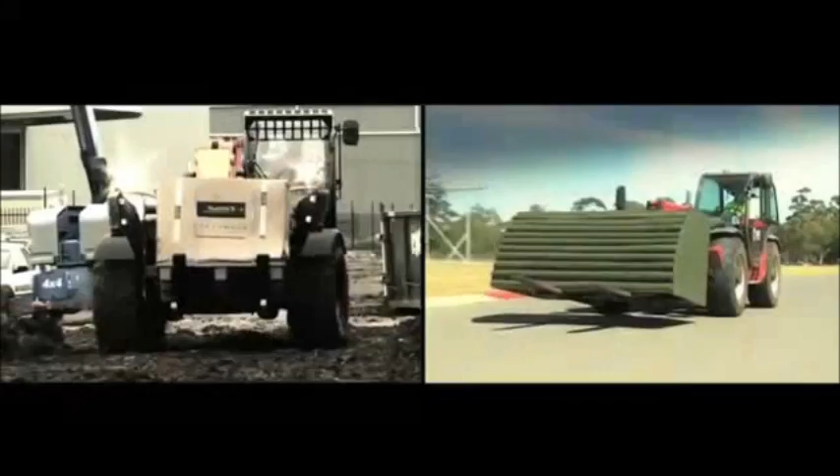This training program for telehandlers has been developed by the Elevating Work Platform Association of Australia, together with major industry partners. It does not attempt to replicate or substitute for any existing programs, but aims to create a safety awareness culture for EWPA members who are using or intending to use telehandlers. The program features short video-based tutorials followed by questions that will test your comprehension of each topic.

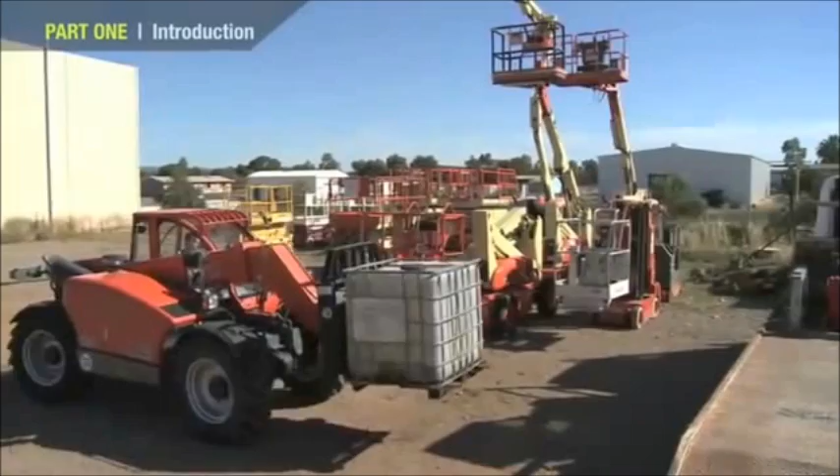This information is provided to offer guidance and duty of care training on the safety aspects of operating telehandlers with standard forklift attachments. It is not to be taken as a statement of law and must not be construed to waive or modify any legal obligation.

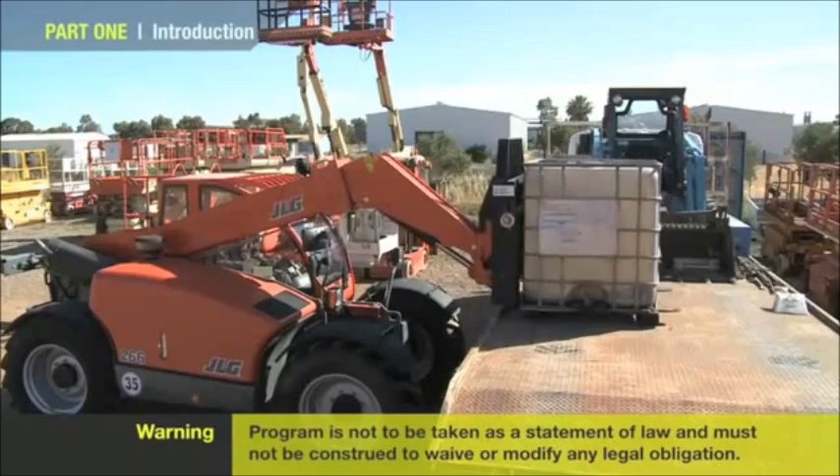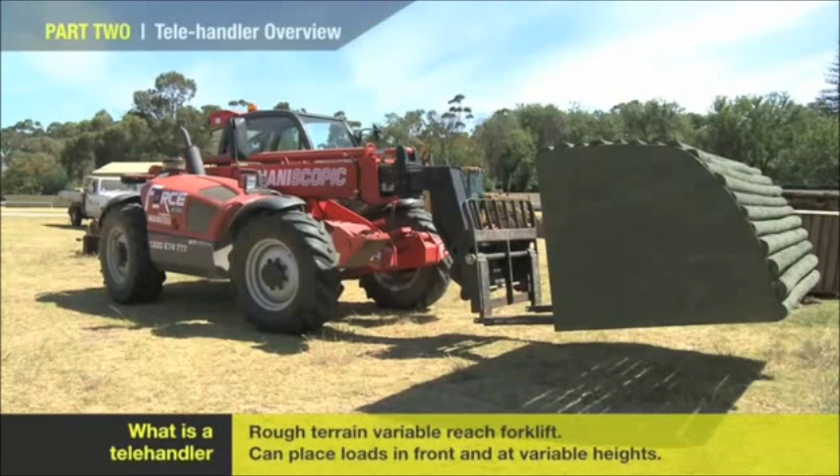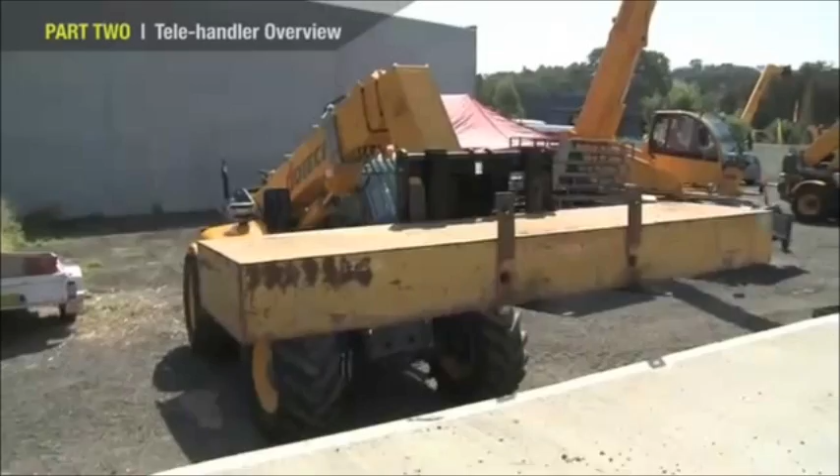A telescopic handler or telehandler can be described as a rough terrain variable reach forklift. Equipped with a telescoping boom, the telehandler is able to pick and place loads at distances in front of the machine as well as at various lift heights. The ability to reach out in front of the telehandler allows the operator some flexibility in the placement of a load. Manufacturer-approved attachments such as crane jibs and EWP baskets can also be fitted.

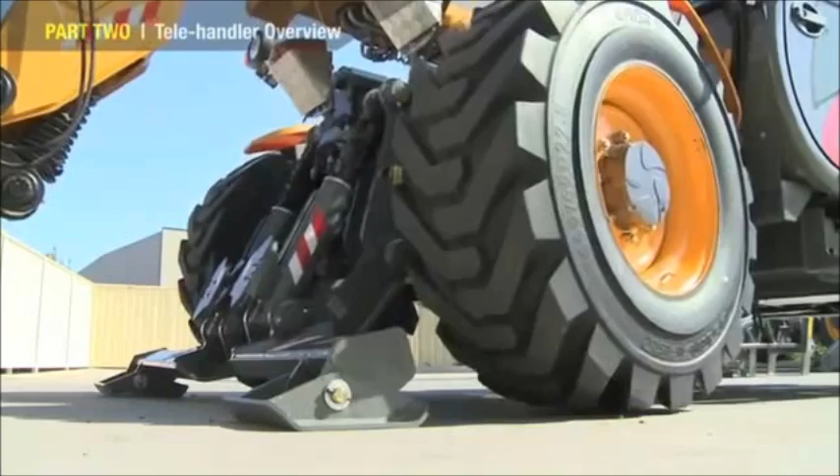There are several types of telehandlers in use, and these can be divided into the following groups: slewing and non-slewing, those that use outriggers, and those that use frame levelling.

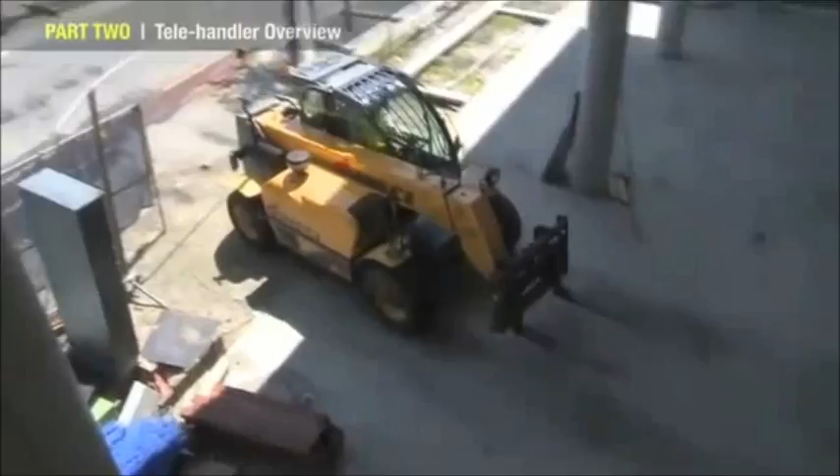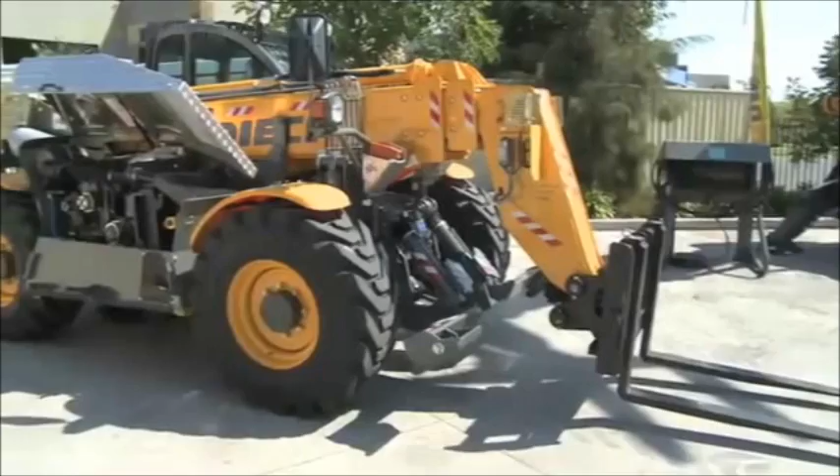To operate a telehandler, you may require specific safety equipment that is prescribed for the conditions you are working in. Typical safety equipment may include a hard hat, safety vest, safety glasses, and steel-capped safety boots. All telehandlers will have specific decals that convey key safety information you need to know. Make sure you understand these decals before you enter and operate the telehandler. There must be a logbook on the telehandler that you must fill in before operation. Ensure the logbook is up to date and stored in the cabin for immediate access.

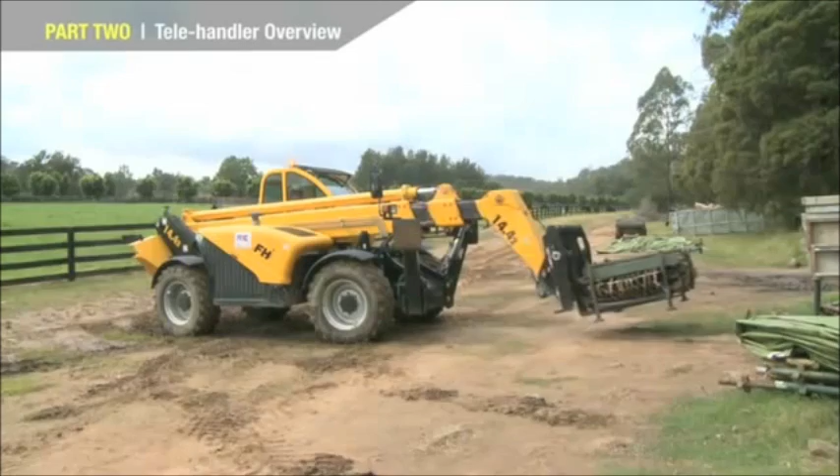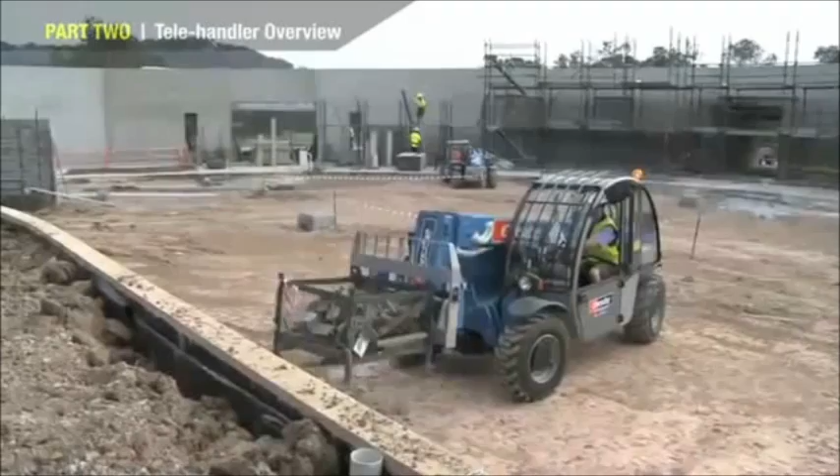Although the forklift attachment is the most common, there are other manufacturer-approved attachments available for use. Approved attachments will have clearly identifiable rating charts and other signs. Unapproved attachments must not be used under any circumstances and may pose a serious safety hazard, such as forks that have been repaired by welding. To work out what you can lift to what height and at what boom length, each telehandler is equipped with a series of capacity charts. We will review these charts in a later section in detail.

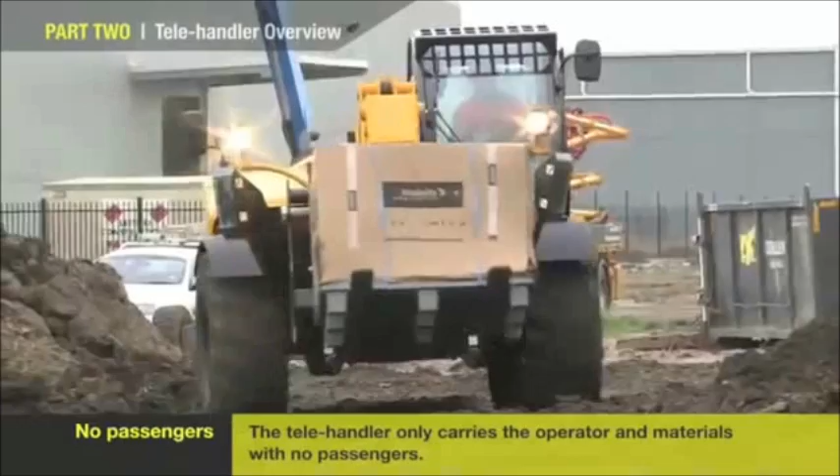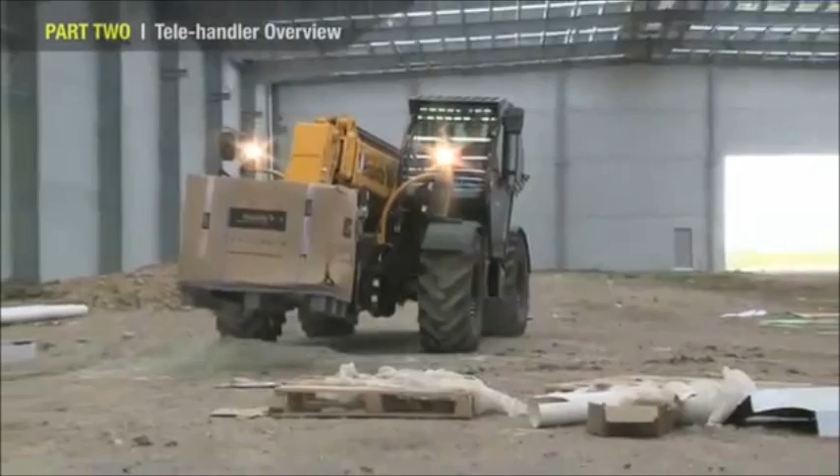There are passing similarities between a telehandler and a car. The main one being that most telehandlers and cars have 4 wheels, pneumatic tyres, and a similar steering wheel and brake arrangement. The big differences are the ones that can lead to serious injury if not appreciated or understood. The telehandler carries the operator and materials only with no passengers. The centre of gravity can shift dramatically on the telehandler with or without a load. Braking is also affected by changes in load weight. The telehandler is designed for low-speed driving and has multiple steering setups suitable for rough terrain.

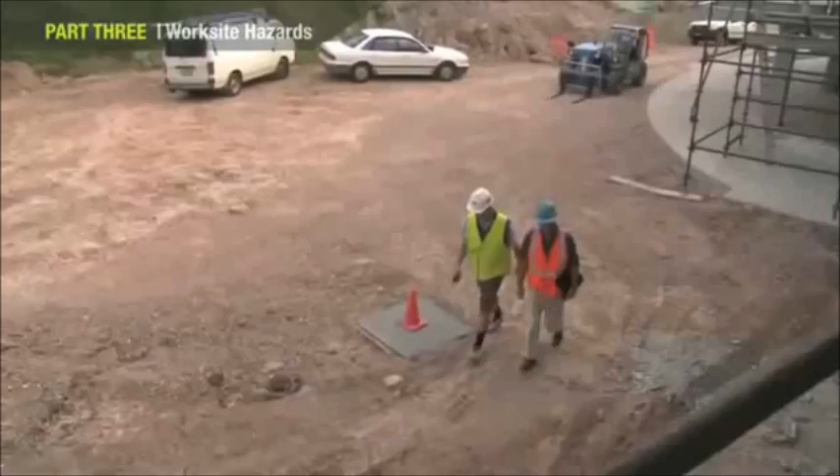Before you operate the telehandler, learn as much as possible about the worksite and carry out a risk assessment. Walk around and inspect the surfaces over which you will be expected to travel. You should discuss site hazards and controls with the site manager before commencing work. Most importantly, you must weigh up the ability of the telehandler to perform the tasks required on the conditions of the surface and around any other obstacles or persons.

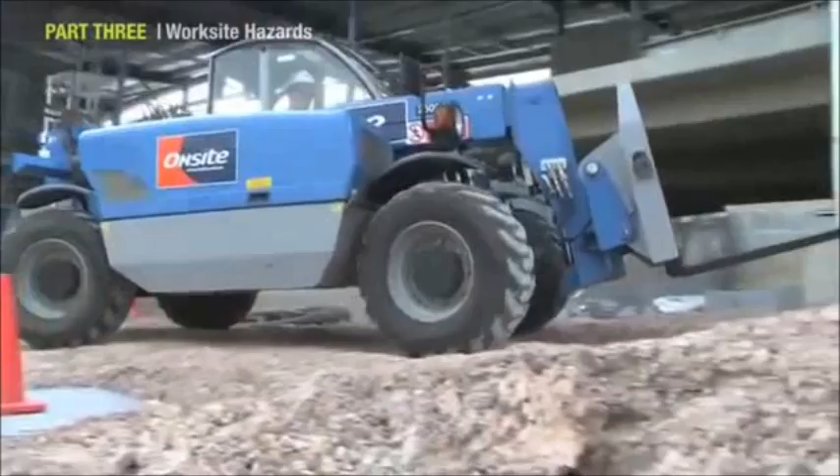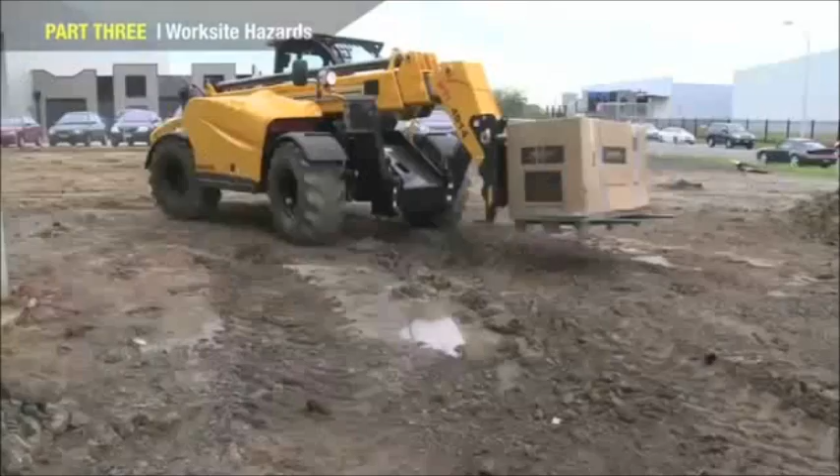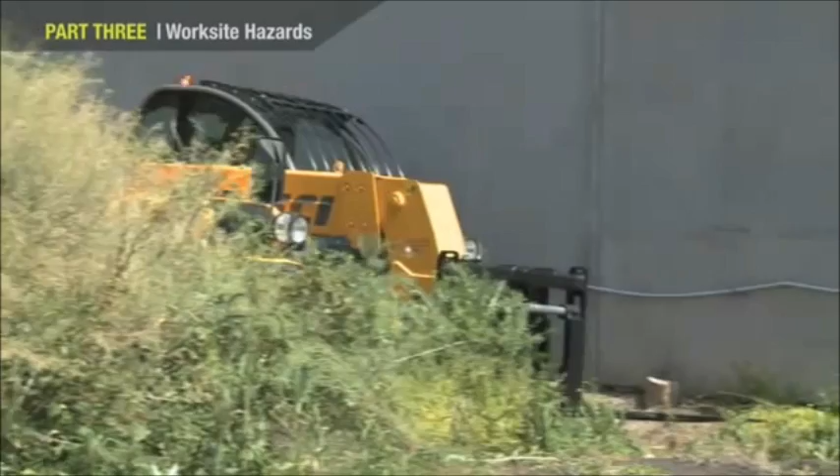Here are some of the common site hazards you may encounter: holes, excavations, drop-offs and culverts. Deep mud, soft soil and obstacles. Slippery surfaces, oil spills and water. Unless you are certain that the depth of water does not exceed a safe operating level, do not attempt to drive through a body of water. Be careful whenever driving through wooded areas. Consider the extension of the load, the forks, boom, and other parts of the telehandler when driving in a wooded area.

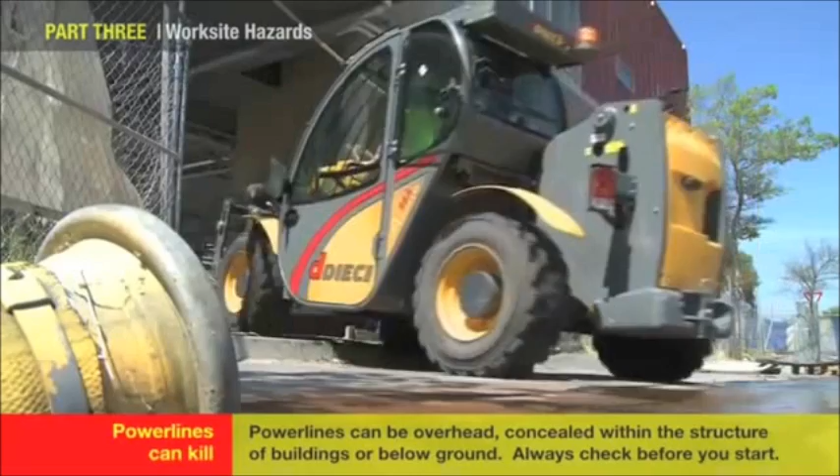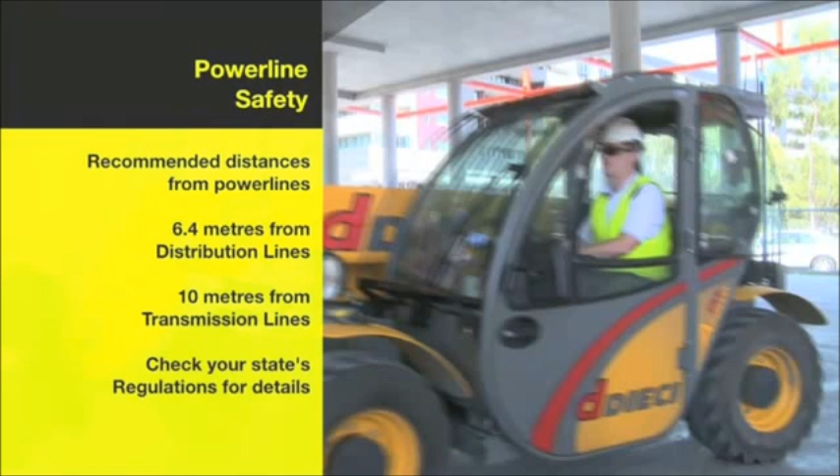Of all the hazards that you will encounter, one of the most lethal is power lines, which can be overhead, concealed within the structure of buildings, or below ground. Always check for power lines before you commence your task. Do not approach power lines, overhead or underground cables or other power sources with any part of your telehandler or load. The recommended distances are 6.4 metres from distribution lines and 10 metres from transmission lines. Check your state's regulations for details.

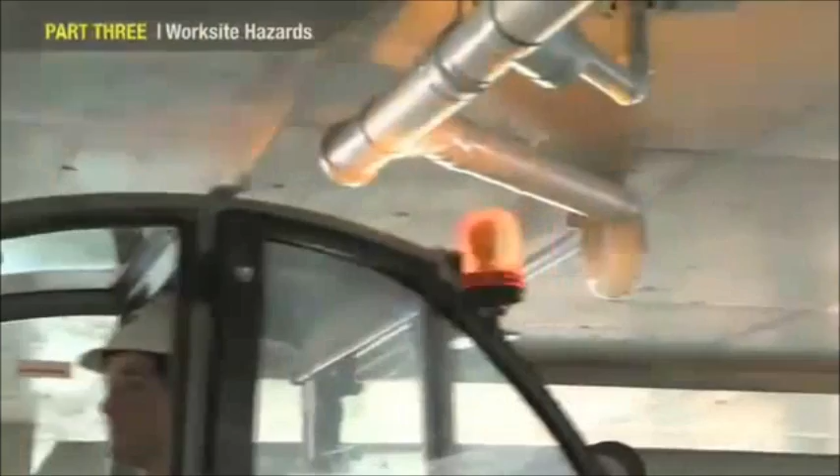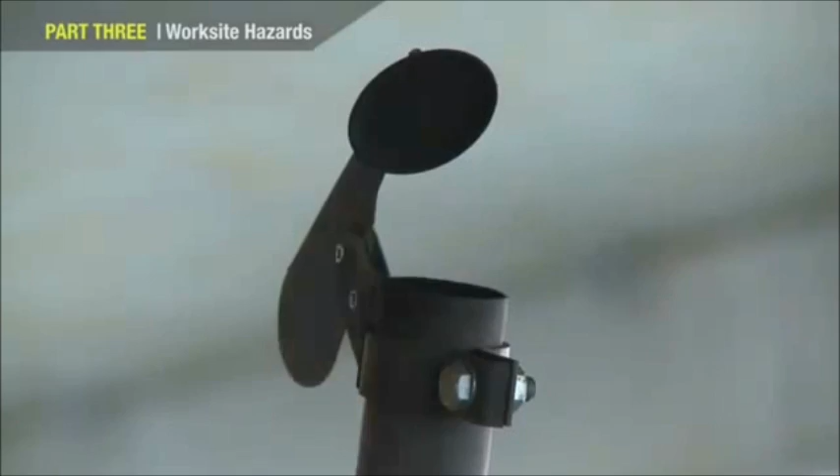In addition to power lines, there may be exposed or hidden gas and water services that can cause damage or injuries through contact. Make sure you know the location of all services before you start work. Telehandlers are powered by combustion engines that emit fumes that can be dangerous to others and yourself if in a confined space.

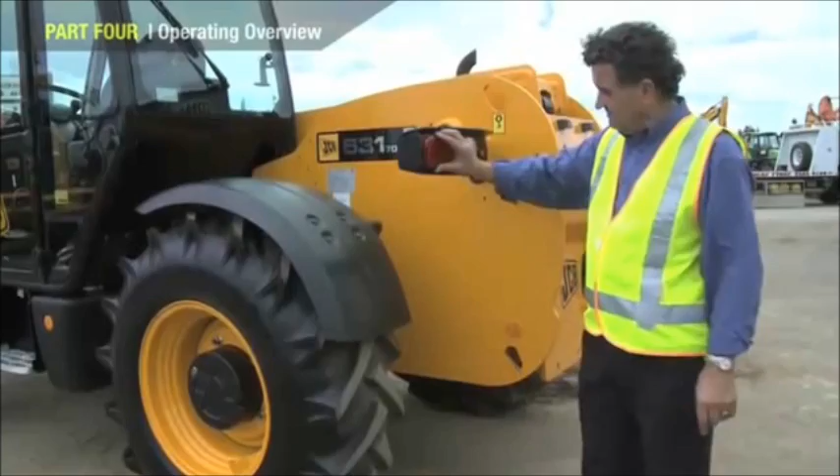The operator must be competent to use the telehandler and any attachments that may be required. Before you start to operate the telehandler, you must walk around the machine and check the condition of the telehandler. Some of the specific checks include that the windows are all clean and mirrors properly adjusted. The fork or other attachments are rating stamped by the manufacturer and are securely attached.

The engine and radiator is free of debris or flammable materials. Oils, fuel and hydraulic levels are good and all caps secured. Tyres are in good condition and correctly inflated. All lights, horns and alarms are correctly working.

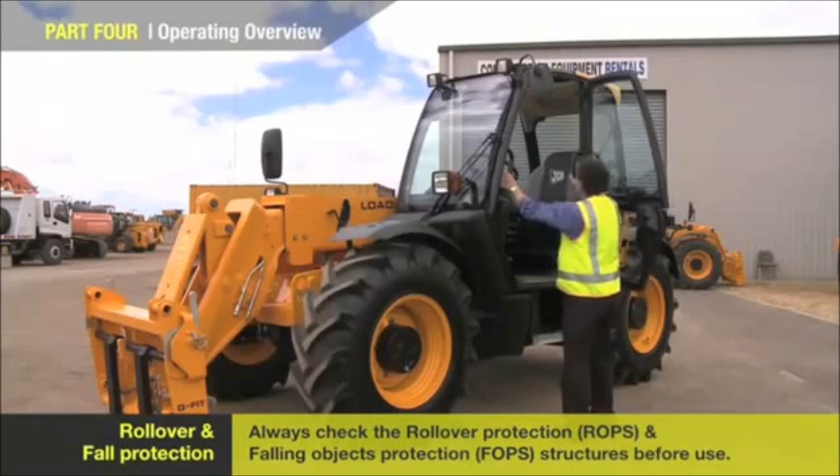The next step is to check the rollover protection structure known as ROPS and the falling objects protection structure known as FOPS, which must be in good condition and free of damage. This protective structure is your main defense in an emergency situation and must be free of cracks or surface damage.

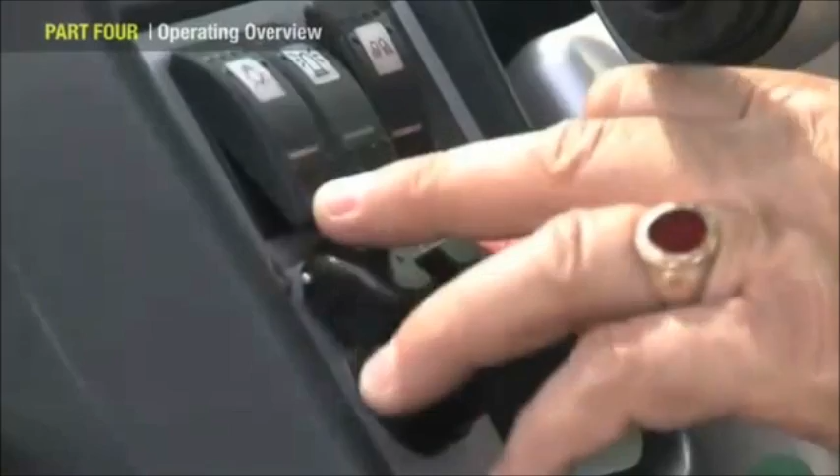Enter the cabin and continue your checking. Sit in the operator's seat. Adjust for comfortable operation. Fasten the safety belt securely around you. Position all controls in neutral. Be sure the handbrake is on. Make sure all switches and lights are working. Sound the horn to warn others in the area before you start the telehandler.

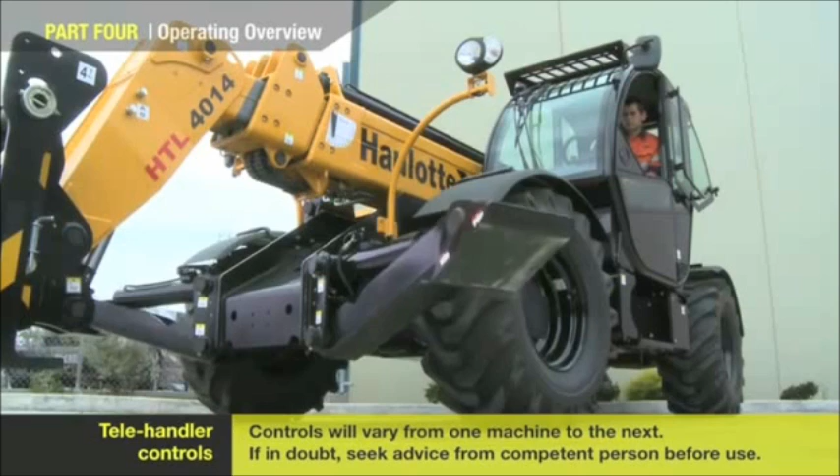Operating the telehandler requires you to learn and understand the controls inside the cabin. These will vary from machine to machine, and you should seek advice from a competent person before attempting to use the telehandler if you are unsure of any control functions.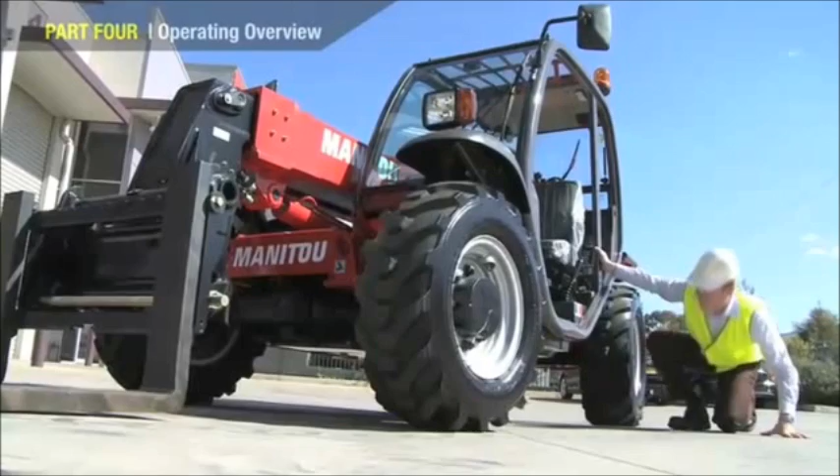The next step is to check functionality and start the telehandler. Always ensure no one is under or immediately around the telehandler before you commence moving. Start the telehandler according to either normal starting or cold starting procedures as explained in the operator manual. In the event that a malfunction or abnormal condition is identified on the telehandler, you should park the machine on a level, safe area and then shut down and secure.

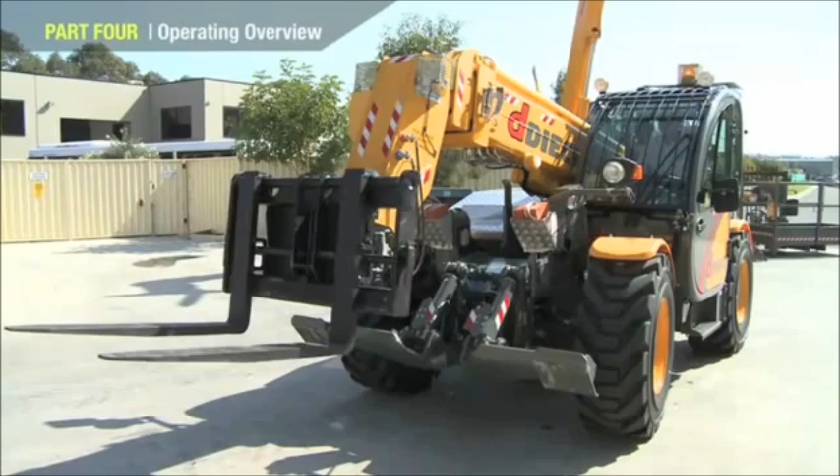Now that you're familiar with where the main controls are, you need to test them before you commence your tasks. These tests include telescopic boom extension, extend and retract, telescopic boom elevation, raise and lower, frame leveling, wheel brakes, parking brake, steering, all modes left and right, horn or backup alarm, fork or carriage tilt, transfer carriage if equipped, outriggers if equipped, and check the load moment indicator or LMI.

Unlike a car, the telehandler has 3 unique steering systems that are employed for a variety of site conditions and uses. The options are front wheel steering, most similar to a car, all-wheel steering, giving tight circling ability in confined spaces, and crab steering for moving on an angle in tight spots. To change between modes, there is a lever or switch that may require you to be stationary at the change.

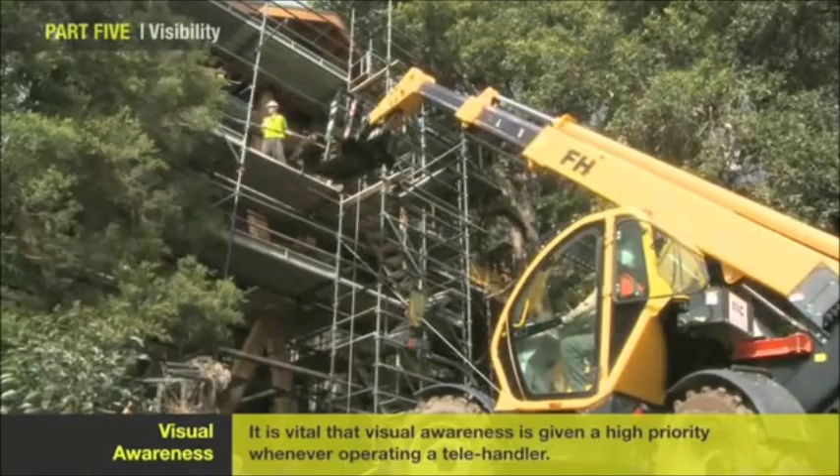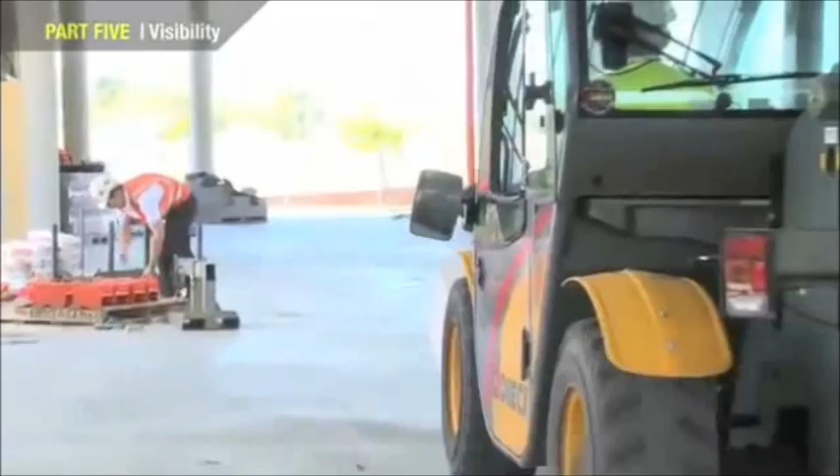It is vital that visual awareness be given a high priority whenever operating a telehandler. Not only must you have the best possible visibility from the machine, but it is also equally important that others see you. Line of sight is one of the most important concerns when driving a telehandler. Impaired visibility is one of the leading causes of accidents.

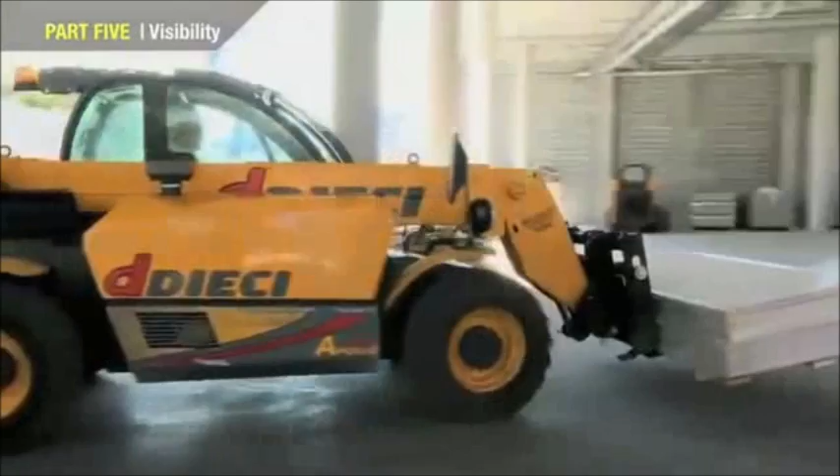Typical line of sight obstructions include boom position in relation to the cabin, direction of travel, a load that exceeds the viewing height of the operator, buildings that obscure views of intersections, stacked cartons. Remember, other site noises may prevent you from hearing any horn or warning device.

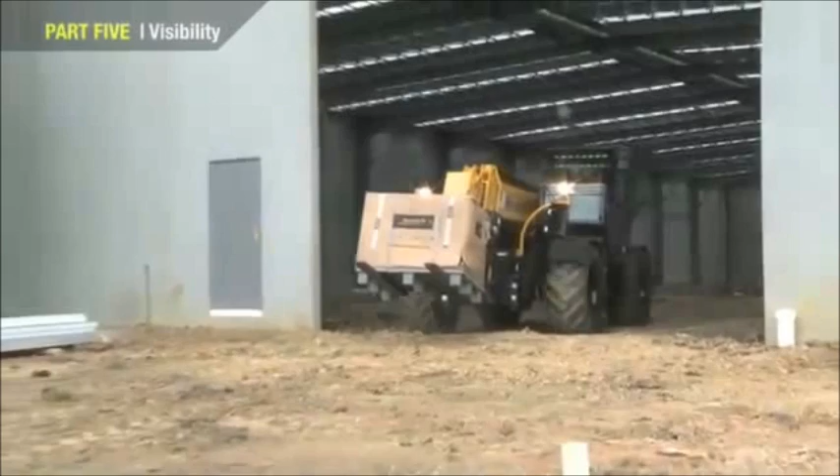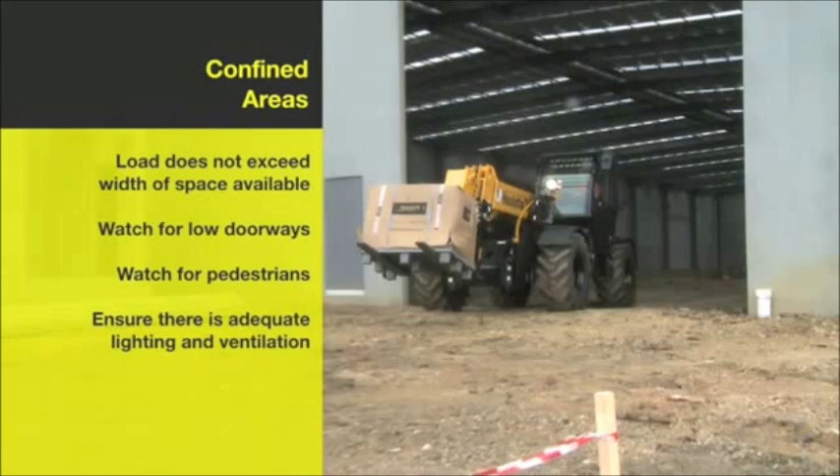In a confined area, such as a narrow aisle or between narrowly spaced buildings, remember to ensure that the load does not exceed the width of the space available. Watch for low doorways. Watch for pedestrians. Ensure that there is adequate lighting and ventilation. Exercise caution whenever entering or leaving a building, especially on bright sunny days. Allow time for your eyes to adjust. Always use your horn, slow down, and be prepared to stop.

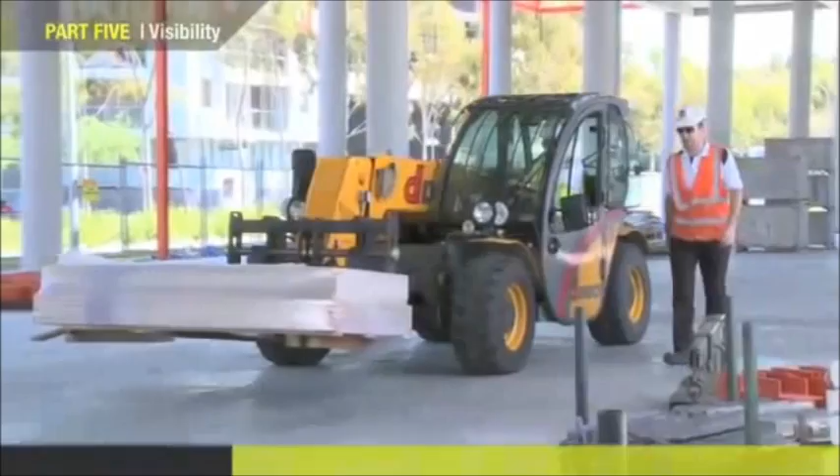Speed should be determined by conditions. It is recommended that once a load has been placed on the forks, you should restrict machine speed to a maximum speed of 4 km per hour, which is walking speed.

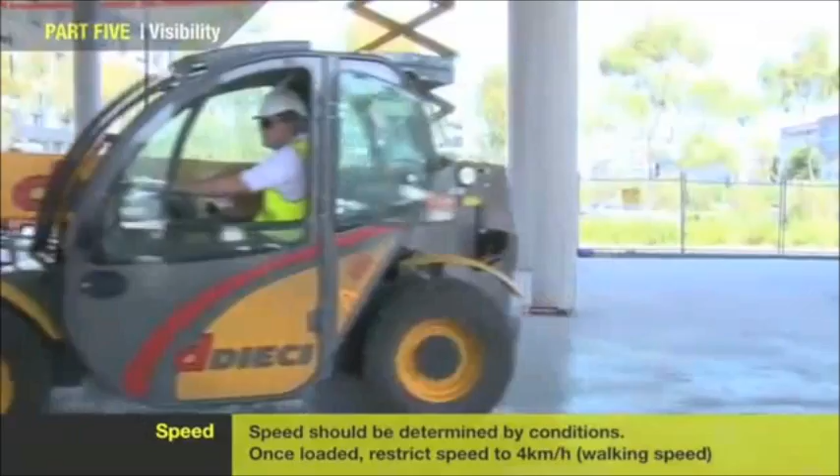The ability to turn the telehandler safely entails many considerations. Among these are tall loads, which may be unstable in turns. Transporting wide loads may lead to problems when a turn is attempted in narrow passageways such as storage racks, between sheds or warehouses, or when travelling in heavily wooded or brushy areas. Be aware of the steering type or mode on the particular machine you are operating.

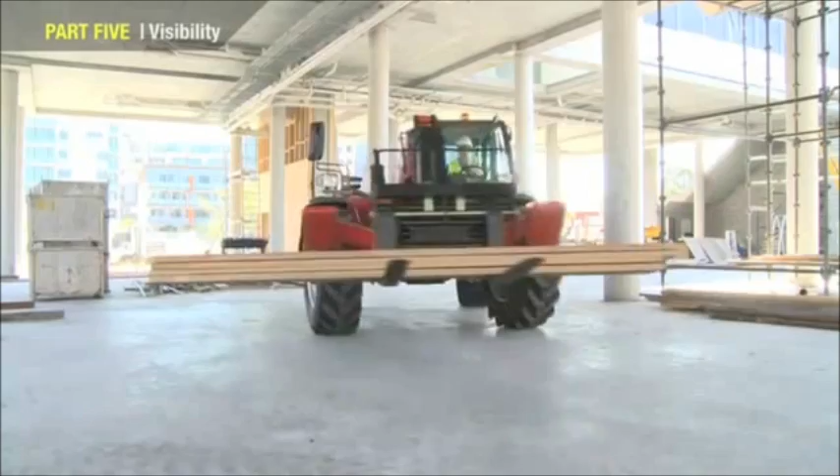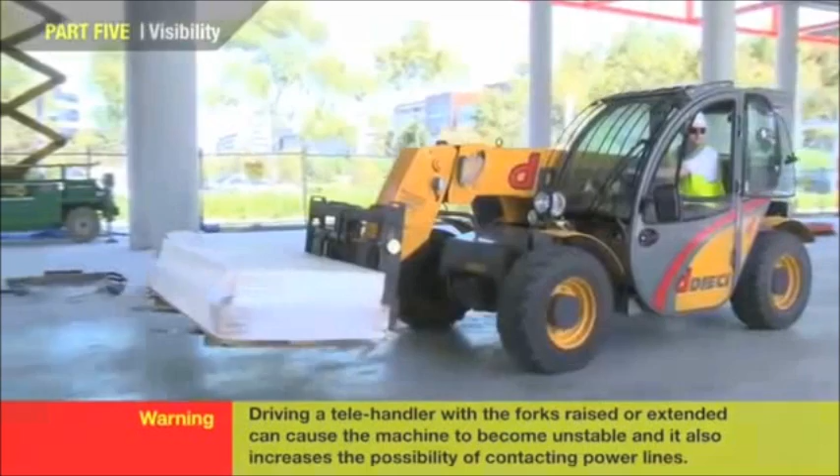To maintain vehicle stability, the fork assembly and its load should be lowered and retracted to a position as near to the machine and ground as possible. Driving a telehandler with the forks raised or extended can cause the machine to become unstable. It also increases the possibility of contacting power lines.

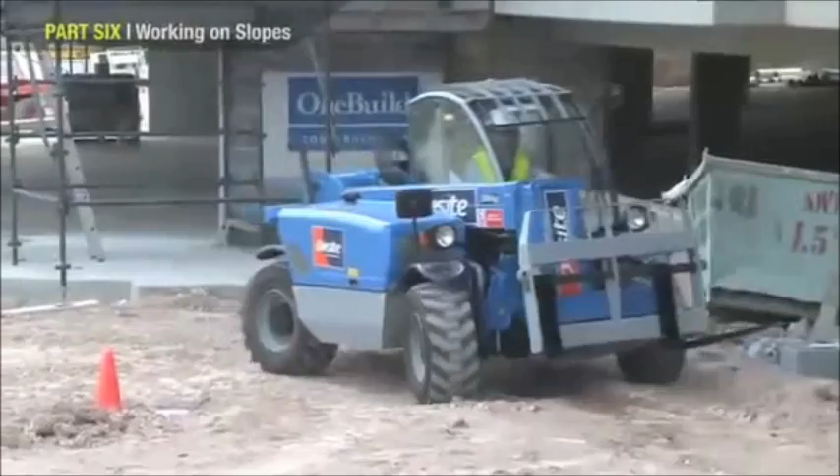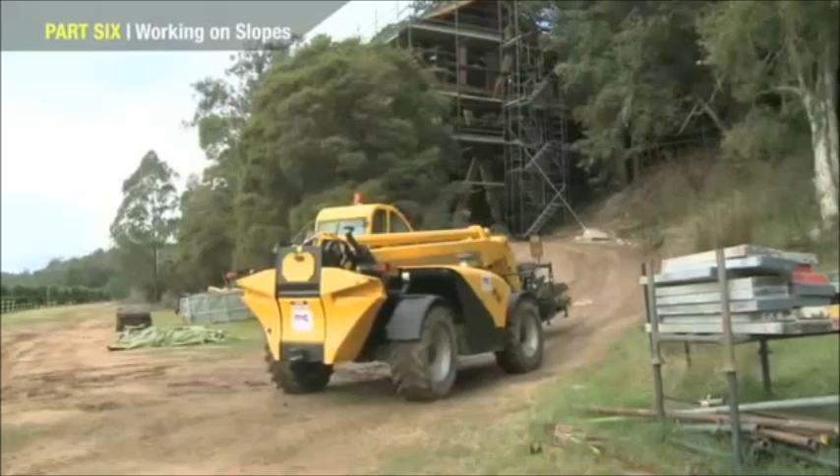Driving on slopes can be dangerous. There is a much greater risk of tip over or load loss. Follow these rules for maximum safety. Avoid excessively steep slopes or unstable surfaces. If you must drive on a slope, keep the load low and proceed with extreme caution. Avoid turning on a slope.

Use a low gear and/or four-wheel drive. This allows compression braking by the engine, helping you to control the speed of the telehandler. Never engage inching or shift to neutral when going downhill. Ascend and descend slopes with the heavy end of the telehandler pointing up the incline.

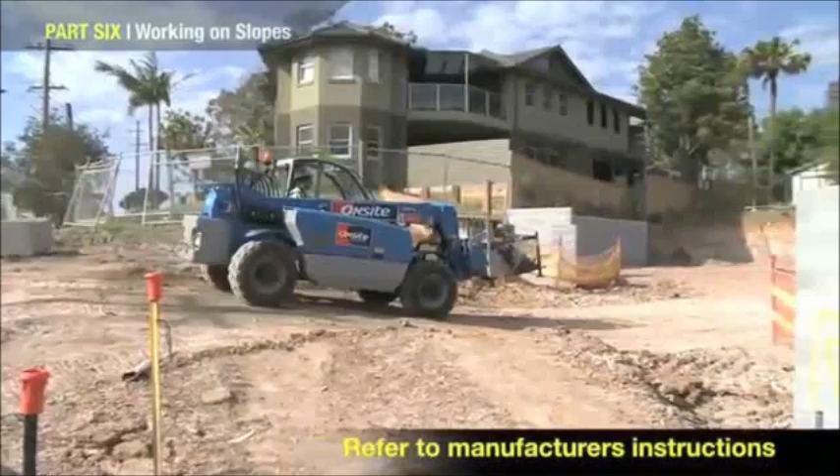Always refer to the manufacturer's load capacity chart to determine if the telehandler is capable of traversing the slope safely. If no specific information is available, keep the heavy end facing uphill, and this will be determined by the weight of the load. In the event the telehandler rolls, you must remain in your seat, hold on firmly, and lean away from the point of impact.

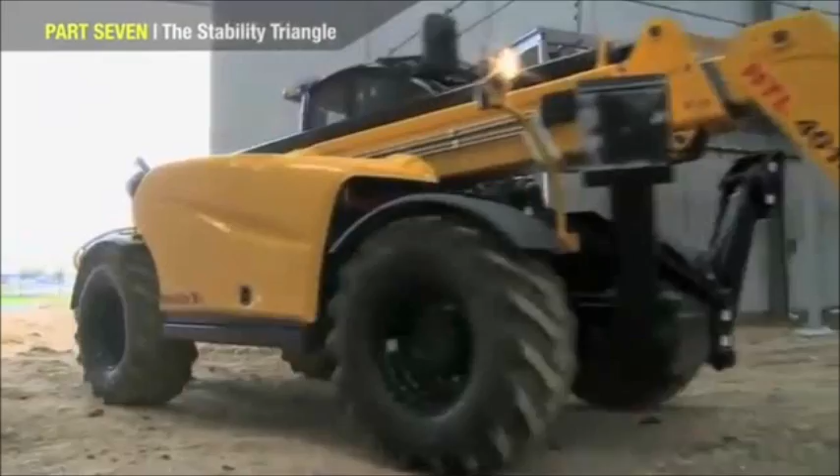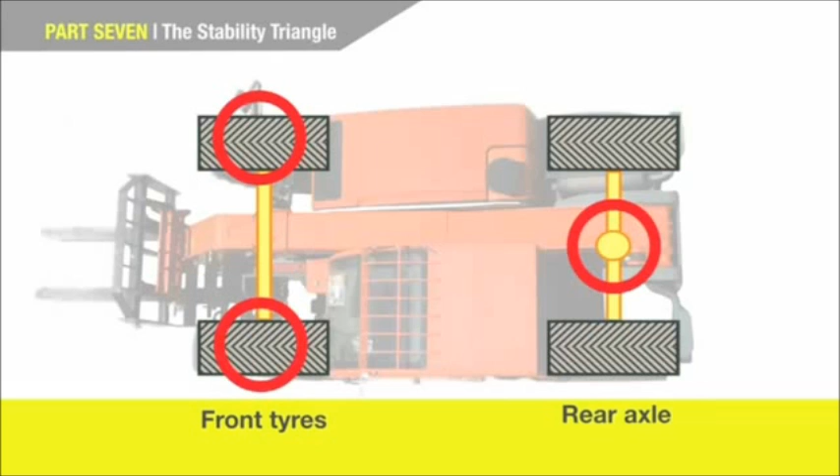It is best to be familiar with some of the basic concepts of telehandlers to understand what makes them stable and what to do to avoid a potential accident. The base upon which the telehandler stands is the two front tyres and a pivot point at the rear axle. The rear wheels are not part of the base because most telehandlers have an oscillating rear axle for travelling over uneven ground. The 3 points comprised of the two front tyres and the rear pivot form a triangle at ground level, commonly known as the stability triangle.

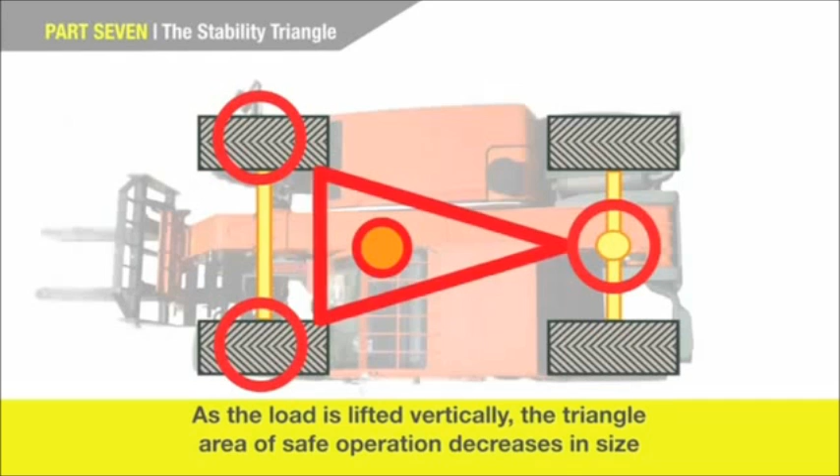As long as the telehandler's centre of gravity, the point around which the machine's weight is equally distributed, remains within this stability triangle, the machine remains stable. The stability triangle is, in fact, three-dimensional, because as a load is lifted vertically, the triangle area of safe operation decreases in size, as shown here, reducing stability. Adding a load to the forks while the boom is down causes the centre of gravity to move forward and down, but raising a load will cause the centre of gravity to move up and to the rear.

Should the centre of gravity move outside the stability triangle, the telehandler will become unstable and will tip over. If the centre of gravity moves beyond the front of the triangle, such as attempting to lift a load in excess of the machine's rating, a forward tip will occur. If the centre of gravity moves outside the triangle to the left or right, such as raising the boom on a hillside, a lateral tip will occur.

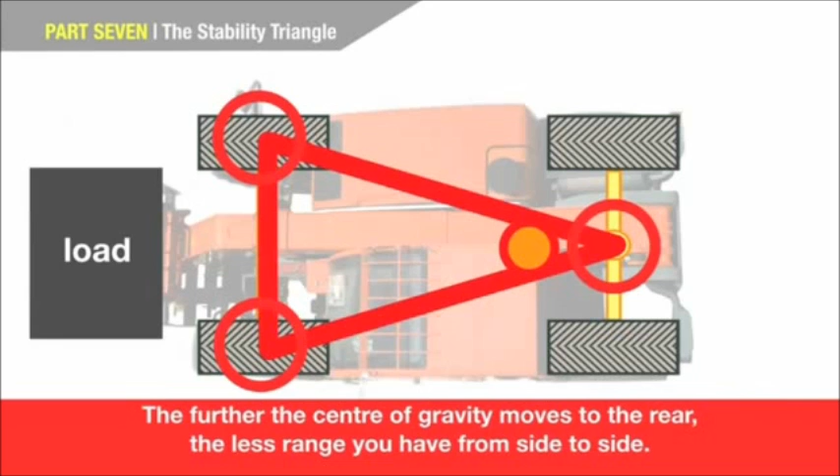The further the centre of gravity moves towards the rear, the less range it has to move laterally and still remain inside the stability triangle. You should be aware that the machine, with the boom fully raised and fully retracted, and with no load, places the machine's centre of gravity at its furthest rearward point.

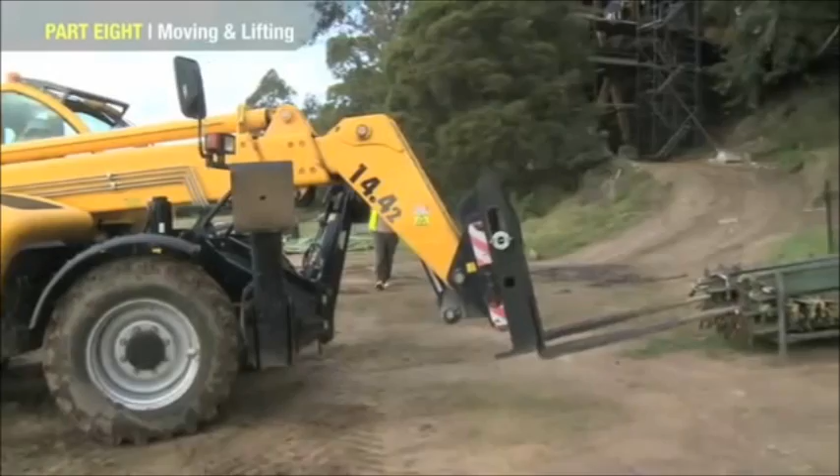Before lifting a load, check that it can extend to a distance required to place the load safely at its destination. For example, a telehandler rated at 3 tonne at 600mm centres is based on the unit being on firm level ground and the boom fully retracted. If the materials you need to lift have no weight identified, you must consult with the supplier or a competent person who can provide the correct weight before attempting to lift it.

After assessing the load and determining it is safely secured to move, position the load on the telehandler forks so that the load is horizontally centered across the forks. Keep the load on the forks as low as practical. Cradle the load by tilting the forks back. Once you have arrived at the lifting position, the lifting and placing of the load can commence.

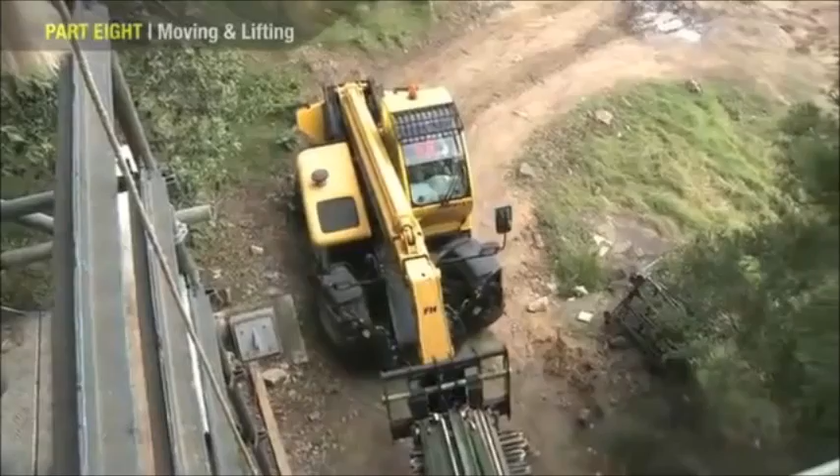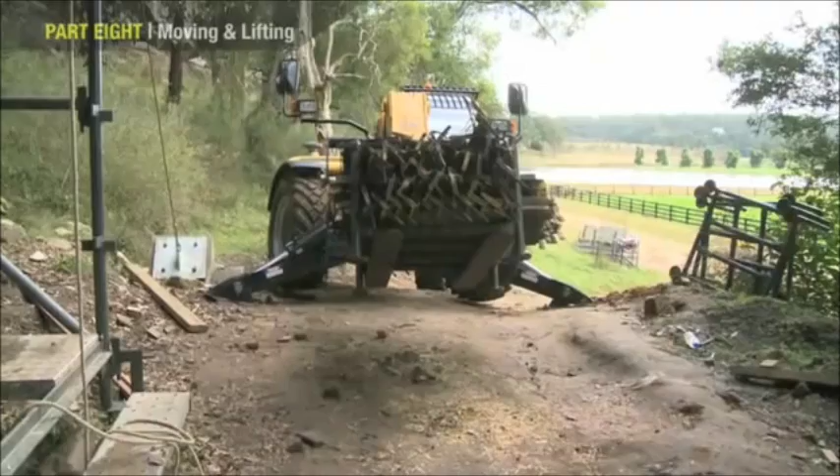Some telehandlers are equipped with frame leveling or stabilizers. Use these in conjunction with sensors and indicators to bring the telehandler into a level position. Make sure that the landing point can safely support the weight of the load and that the landing point is level, front to back and side to side. You should lift the load by raising and extending the boom up to the landing position.

On many sites, there may be services or power lines above you. Always check and ensure you are well clear of these hazards. Remember, while you are lifting a load, never engage a load or lift a load more than 1 metre above the ground unless the telehandler is level. Once the telehandler frame is level and the telehandler has raised a load more than 1 metre above the ground, it must not be moved from this position.

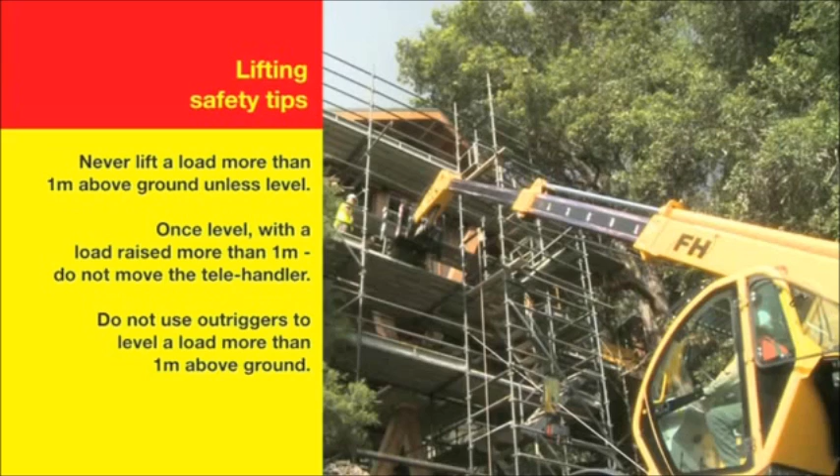Do not use outriggers to level the telehandler with the load more than 1 metre above the ground. After you have lifted and placed the load, retract the boom and return it to the carry position, and retract any stabilizers or adjust frame leveling before moving the telehandler.

Safely shut down the telehandler as per the operator instructions. Park the telehandler in a safe location and remove the ignition key. Walk around the telehandler and inspect for any damage which must be entered in the logbook and reported if in need of attention.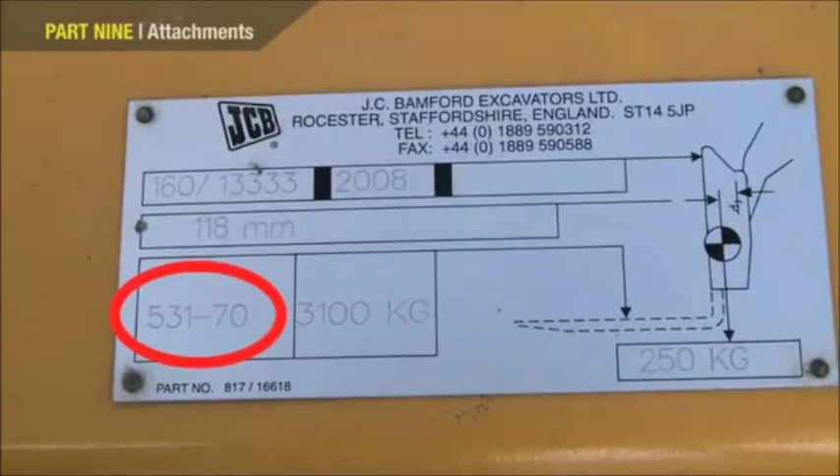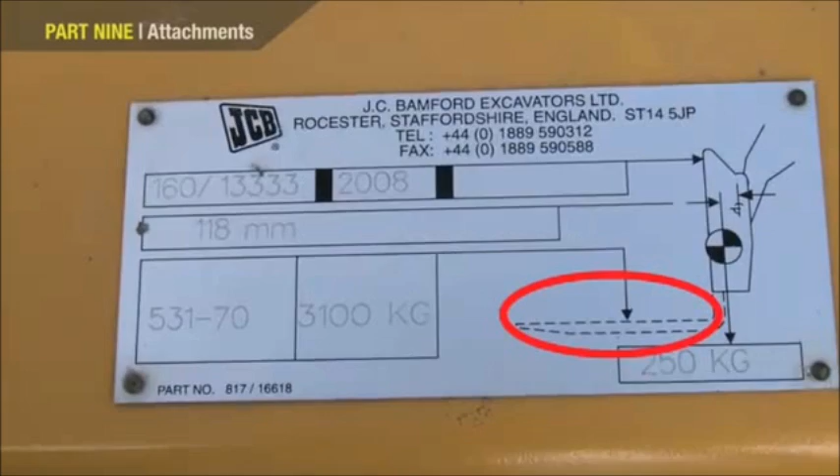To determine if an attachment is approved for use on the specific telehandler you are using, the attachment model or option number on the attachment identification plate must match the attachment number on a capacity chart located in the operator cab. The model on the capacity chart must match the model telehandler being used. The load centre of the fork must match the load centre as indicated on the capacity chart.

Hydraulically powered attachments must only be used on machines equipped with auxiliary hydraulics. If any of the above conditions are not met, do not use the attachment. Once you have verified that the fork or attachment you are using is correctly matched to the telehandler, you will then need to assess its ability to lift and place the load.

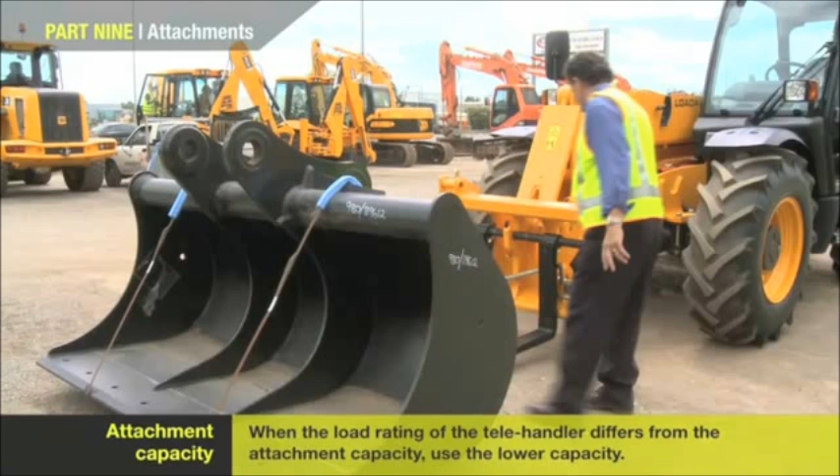When the load rating of the telehandler differs from the capacity of the forks or attachment, the lower value becomes the overall load capacity. Use the capacity chart to determine maximum capacity at various machine configurations. Lifting and placing a load may require use of more than one capacity chart based on machine configuration.

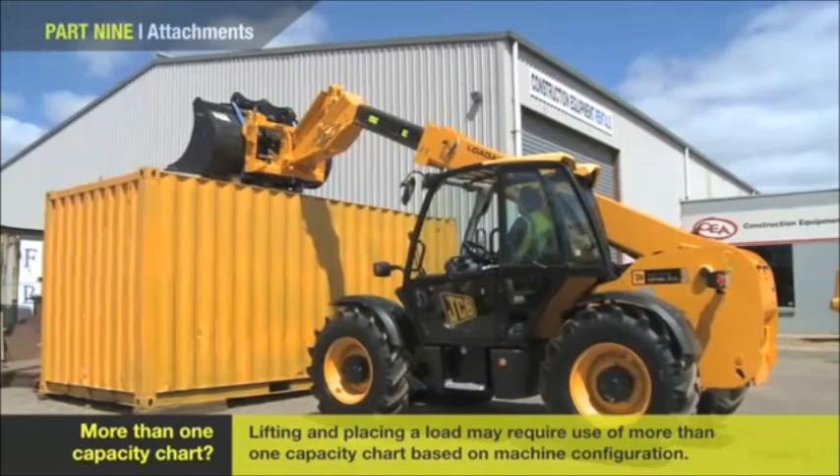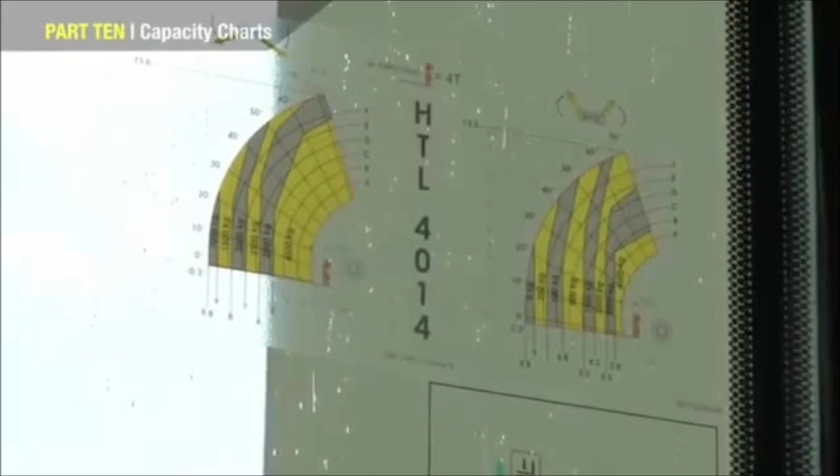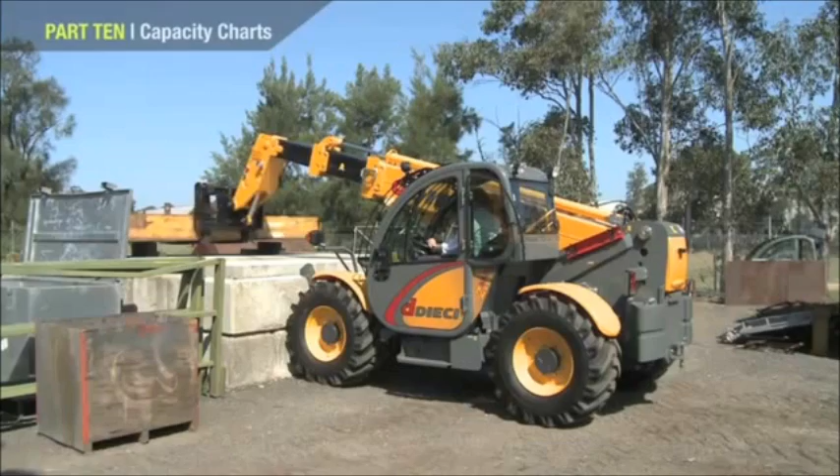Without load charts, there would be no way of knowing just how high and how far we could lift a load. Manufacturers supply load charts to give the operator certainty in what can or cannot be lifted and to what boom extension. As the centre of gravity is determined by the vertical and horizontal position of the load, the machine could tip without warning once you have moved the centre of gravity outside of the stability triangle.

Therefore, to use a load chart for your lift, you must have the telehandler on level ground and have the tyres inflated to correct pressure. Other factors can be wind speed, ice or poor soil conditions, which combined or on their own could cause an accident to occur. Load charts are designed to allow the operator to lift and place a load by following a chart that has a horizontal or X-axis and a vertical or Y-axis.

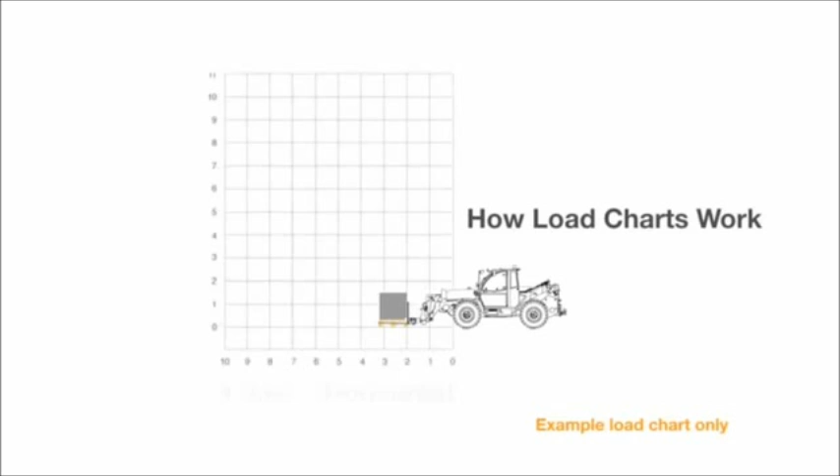The load centre is always located 600 mm from the backstop of the fork tines, and you should centre the load horizontally on the forks as well. These examples are for pallet or symmetrical loads, and pipes or long loads will require a different calculation.

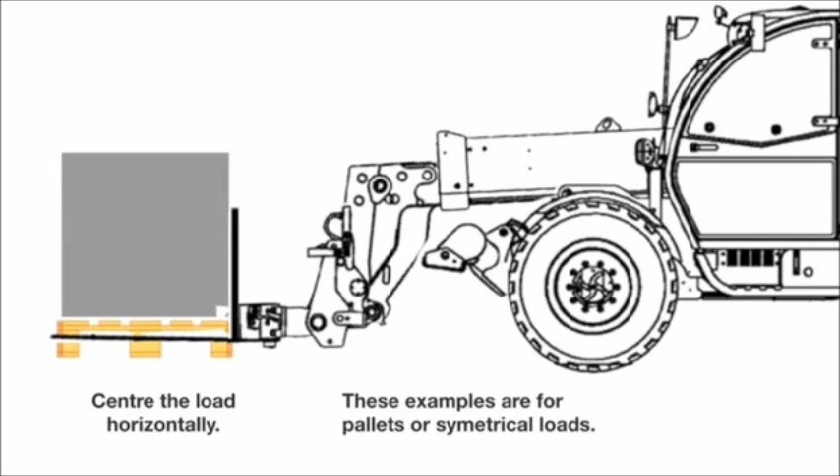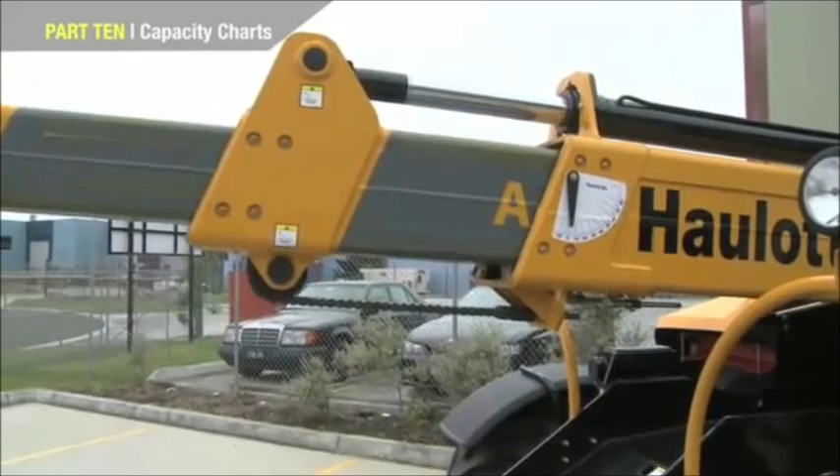Telehandlers with stabilisers will often have a higher lifting and extension capacity and a bigger stability triangle in the forward direction. Where the horizontal distance and the vertical height combine to match your boom extension and lift height, an angle is shown on the boom arm. As the boom is extended, numbers or letters will indicate the amount of extension.

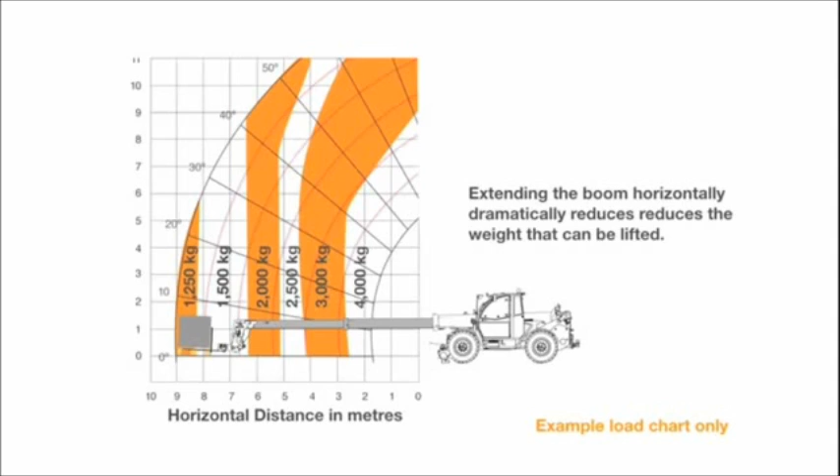For instance, the chart shows if we simply extend the boom horizontally in front of the telehandler, the weight that can be supported reduces dramatically. In this example, the weight that can be supported at a 2-metre horizontal extension is 4,000 kilograms, but at 9 metres it reduces to only 1,250 kilograms.

The chart shows that if we extend a 4,000 kilogram load straight up with no extension of the boom, we can lift it to 6.27 metres. If we extend the boom out forward, the lifting capacity drops immediately by 25% to 3,000 kilograms. The further the extension forward at height, the more the reduction of lifting capacity, as shown here.

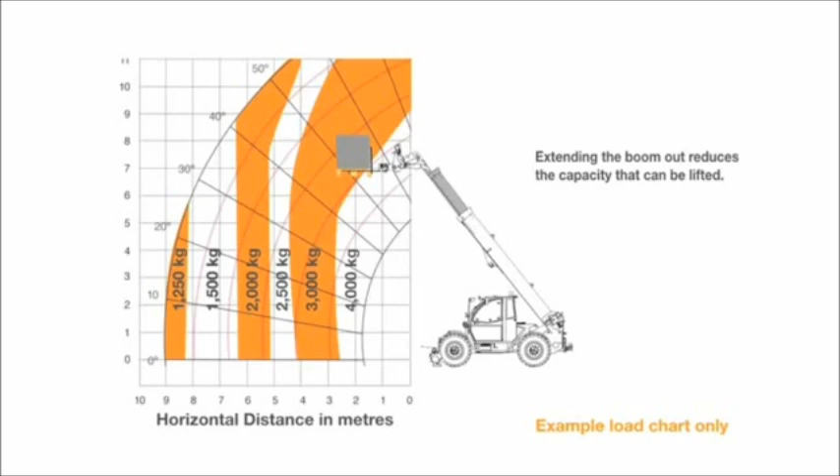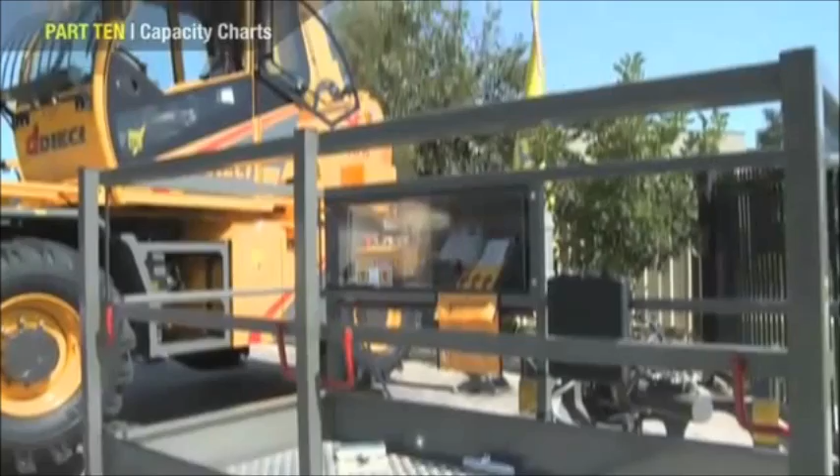To properly use the capacity chart, the operator must first determine and/or have the following: a manufacturer-approved attachment, the proper capacity chart, weight of the load being lifted, load placement information, height where the load is to be placed, distance from the front tyres of the telehandler where the load is to be placed.

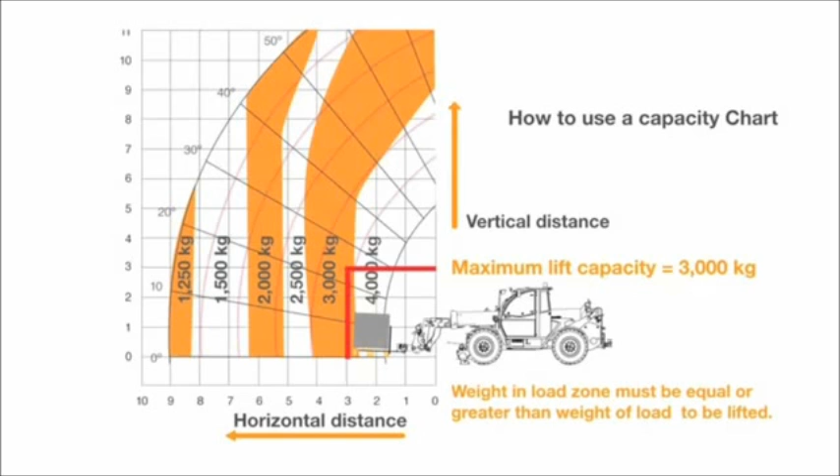On the capacity chart, find the line for the height and follow it over to the distance. The number in the load zone where the two cross is the maximum capacity for this lift. If the two cross at a division between the zones, the smaller number must be used. The number in the load zone must be equal to or greater than the weight of the load to be lifted. Determine the limits of the load zone on the capacity chart and keep within these limits.